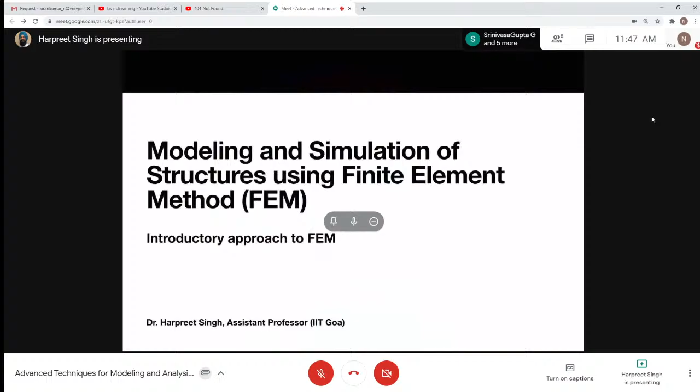Okay, so the topic of my talk is modeling and simulation of structures using finite element methods. Today I'm going to give you an introductory session for the FEM approach, meaning the finite element method approach. Let us start with this.

So first of all, what is FEM? I think you guys have heard many definitions of FEM, and I've mentioned a few in this presentation. The most prominent definition is that it is a numerical method for finding out the solution of a boundary value problem, which is formulated in the form of partial differential equations.

Professor Mahajan already mentioned in his talk that every physical phenomenon, whether mechanical, thermal, fluid, chemical, or any other, can be formulated in the form of partial differential equations. Along with partial differential equations, if we have some boundary conditions, then collectively we name this partial differential equation problem plus boundary condition as a boundary value problem.

So finite element method is one of several techniques available, and it is the most popular method for finding the approximate solution of these boundary value problems. This is not an exact technique for finding the solution of boundary value problems — it is a numerical method, and also an approximate method, meaning it doesn't give you the full 100% exact solution of the partial differential equation. There will always be an error in the system, and we always try to minimize that error. There are various techniques to minimize it.

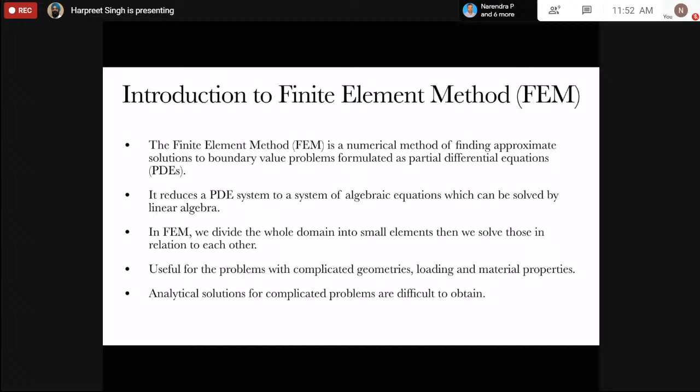So let us see the history of FEM. The history of FEM goes very far back. In early 1943, R. Courant gave the technique of solving structural problems using the principle of minimization of energy. This is also called the Ritz method nowadays. He used that technique for solving complex structural problems, and he succeeded, and it became the basis for FEM.

From 1950, the Boeing team started working on complex geometries. They divided the complex surfaces into triangular subdomains and started using algebraic methods for getting the behavior of those small triangular subdomains, then assembling those into the large system. From 1950 to 1960, the Boeing team worked extensively on this technique, and after that they started publishing in that area.

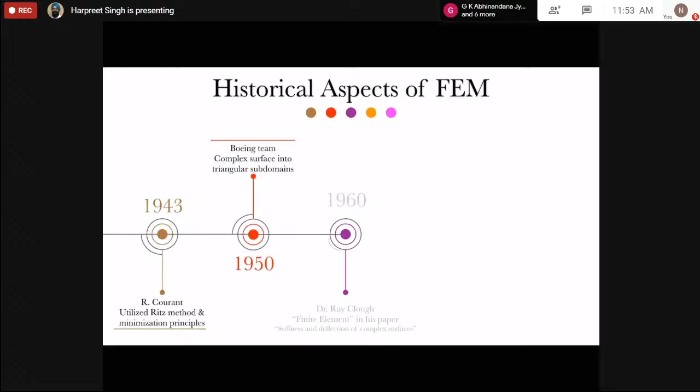In 1960, a research paper was written by Dr. Clough, and in that paper, for the first time, they used the name 'finite element' for those subdomains. The name of the paper was 'Stiffness and Deflection of Complex Surfaces.'

After that, from 1960 to 1970, this decade, I would say, is the era of FEM. In that decade various techniques related to FEM were formed, and a company called MacNeal-Schwendler Corporation, MSC, developed an FEM code for about 68K nodes, written in collaboration with NASA, and they named this code MSC Nastran. That became very popular during that era.

From the 1980s to 1990s, various agencies and research organizations started working on FEA, and they also combined various CAD techniques available with FEA. In that period, they merged FEA and CAD into one platform and used it for solving various structural problems. Nowadays it is very common; easily available packages can be found in the market which we can use for solving complicated structural problems.

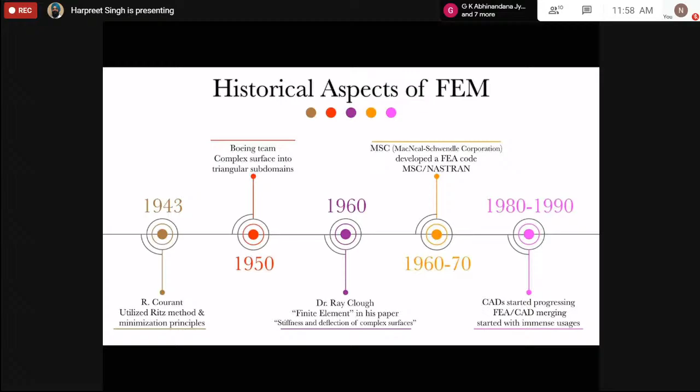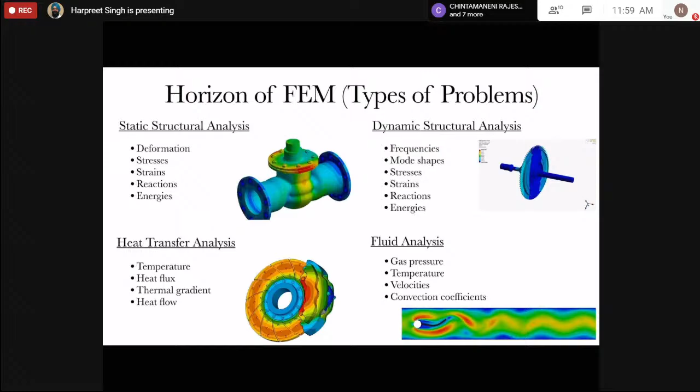So let us focus on solid mechanics or structural problems. On the basis of loading, I want to mention the spectrum of different kinds of problems we can solve using FEM, especially in case of solid mechanics. Solid mechanics problems, based on the loading type, we can divide into two categories: one is static problems, other one is dynamic problems. This shows the static side and this shows the dynamic side.

This is based on the type of loading. If the loading is a function of time, then the problems are lying in the area of dynamic side. And if loading is constant with respect to time, then it is called static problems.

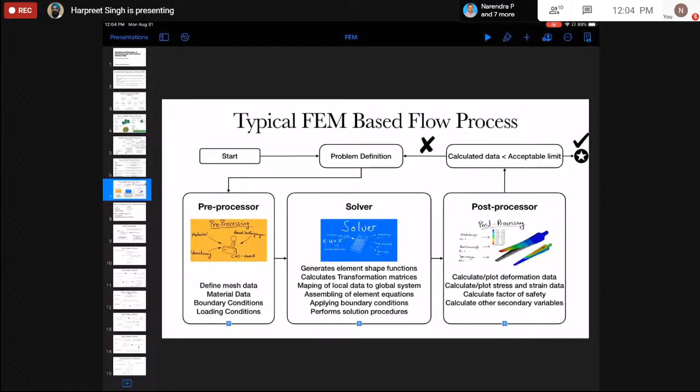So what are the typical steps we follow in case of FEM? There are 6 steps which we follow in FEM analysis. First of all, we discretize a domain into subdomains. This first step is named discretization. The subdomains are especially called elements here, and the whole process of discretization is called meshing.

We have various tools available apart from FEM solvers which are used for this purpose. Have you heard of Hypermesh or Gmsh? These softwares we can use for discretization of the bigger domain into subdomains, and these subdomains are called elements.

So the second step is named developing the elemental equations or elemental governing equations. In that step, on the basis of the shape and order of those subdomains, we develop or write the elemental level governing equation for each element.

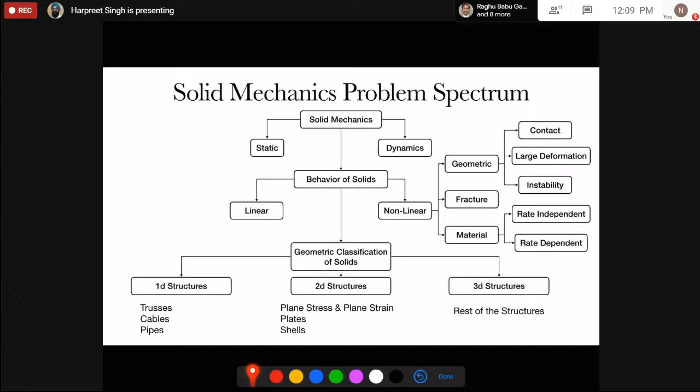Now let us talk about the FEM based flow process, meaning the design flow process. If you want to design a system, what are the steps you will follow where you can use the FEM technique? First, we define the problem statement, which will be in the form of domain size as well as other parameters, for example boundary conditions, material properties, or time dependent material properties. These will be part of the problem definition.

After getting all the information regarding the problem, what we do is supply that information to the preprocessor.

The preprocessor means the information passed to the preprocessor that will be used for further processing, meaning the material data. For example, in case of structures, we give elastic modulus, Poisson's ratio, density of the material, or if we want to analyze plastic material, then we give the yield strength or the hardening modulus or other things. This material data is supplied in the pre-processing stage of the FEM.

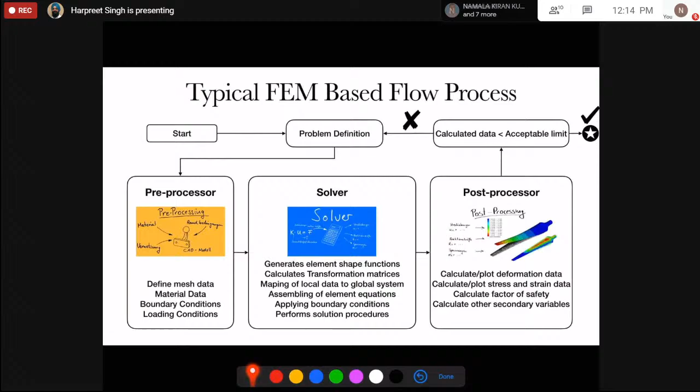Next we will talk about the basic terminologies used in structural analysis. We have already seen that we generally write the partial differential equation for a structural domain, and in that equation we generally see these variables: forces, tractions, and point loads. The first is forces or body loads or volume loads, the second is tractions, which are surface loads, and the third is point loads.

All these are used for formation of the partial differential equation of the system, which we call the equation of equilibrium. In case of structures, this takes the form: sigma ij comma j plus fi equal to zero. That is the equilibrium equation for structural problems.

Sometimes we also see boundary conditions in the form of displacement being zero in some portions, or displacement at some boundaries or subdomains being constant. This is especially the displacement boundary condition. But we can also mention that sometimes forces are specified on the boundaries, either in the form of point loads, traction loads, or body loads.

Okay, so these are the terminologies which are used for the structural problems. Apart from that, how we can process this one, we have various methods.

The methods which are very famous are Galerkin's method and the Rayleigh-Ritz method. Rayleigh-Ritz method is another form of the principle of virtual work for structural mechanics problems. These two are approximate methods for finding out the solution of the partial differential equations. Either of these two could be used for finding out the solution of the partial differential system, and these are the fundamental framework for the finite element method.

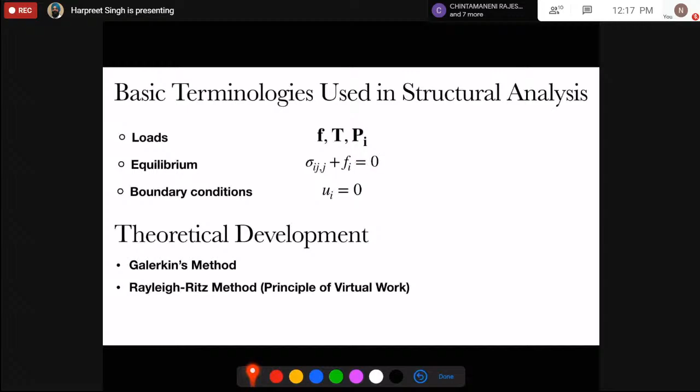I think I talked about finite elements, nodes. So what are these? Nodes are nothing but specific points related to the particular element where we want to see the values, meaning we want to calculate the values of the primary variable as well as the secondary variable. These, I would say, are the points of interest.

Apart from that, we will also hear about shape functions. So what are these shape functions? These are the interpolation functions. As I told you, FEM is an approximate technique. We are using some kind of interpolation functions or approximate functions for finding out the values of primary variables. So these shape functions are related to those.

I have given an example here also, that suppose we want to find out the value of phi, which depends upon x and y coordinates. This we can write in the form of shape functions N1, N2, N3. These are the three shape functions, and phi1, phi2, phi3 are the values at some specific points, meaning those points are called nodes. I will also explain more about shape functions in the next slide.

Apart from that, you will also hear about degree of freedom. What are the degrees of freedom? These are the independent variables associated with each node, or sometimes we also associate them with the element. The number of variables which define the state of the system per node is called degrees of freedom. Sometimes we also combine all the nodes of an element and take the sum of all the degrees of freedom, and say that is the degrees of freedom of that element, but this is not the right approach. Degrees of freedom are more related to the nodes.

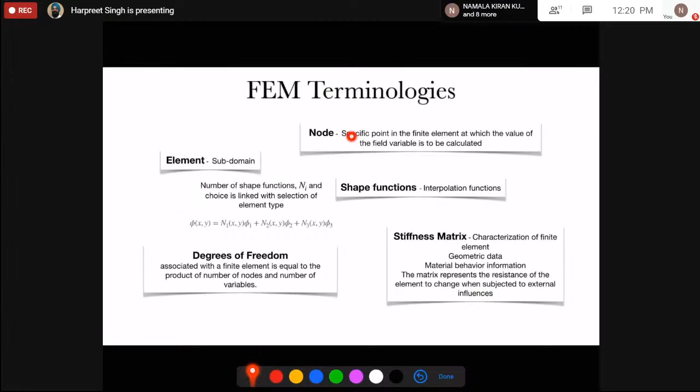Let us use a simplified approach called the direct stiffness method for understanding FEM. This whole method we can relate with FEM, and we can say this is the method which is being followed behind the FEM technique or FEM software. So first of all, what is happening in case of direct stiffness method? We can start the understanding of direct stiffness method by taking a simplified spring element.

This is a spring which is shown here, having stiffness K, and the length of the spring is L. On one side, I have named this end as 1, and the other end is named as 2. At 1, I can now assign the degrees of freedom. Suppose this is only a 1D system, it can move only in one direction, so it will have only 1 degree of freedom per node. These 1 and 2, we can say, are the two nodes of the system.

U2 is the degree of freedom at node number 2, and U1 is the degree of freedom at node number 1. U1 and U2 are both the primary variables of the system. Apart from that, there are forces at these two nodes: F1x is the force applied at node number 1, and F2x is the force applied at node number 2.

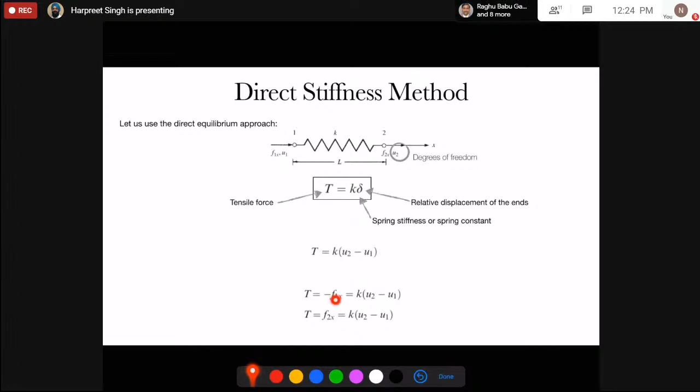If I use these two equations further, which are written here, and change these two coupled equations into a matrix equation, I will get this system of matrices. The first one is the force matrix, which is a column matrix, the other one is the stiffness matrix, where all the stiffness values or spring constants are written, and the third one is the degree of freedom matrix, which is also a column matrix. This system of equations gives us the behavior of the system.

So how does this spring system react after applying the forces? We can apply forces as F1x and F2x, and ultimately, by applying these forces, we will get the response of the system as U1 and U2.

Further, we will assume this system is a linear system. K is constant, and the forces and displacements are related with each other in a linear fashion. If I use that assumption, then I will see that my displacement from U1 to U2 varies linearly. After applying this linear variation assumption, if I use the boundary conditions, suppose on one end I name this as 0 and on the other end the value of x is L, then using these two boundary conditions, I will get U1 as A1, and A2 as U2 minus U1 divided by L.

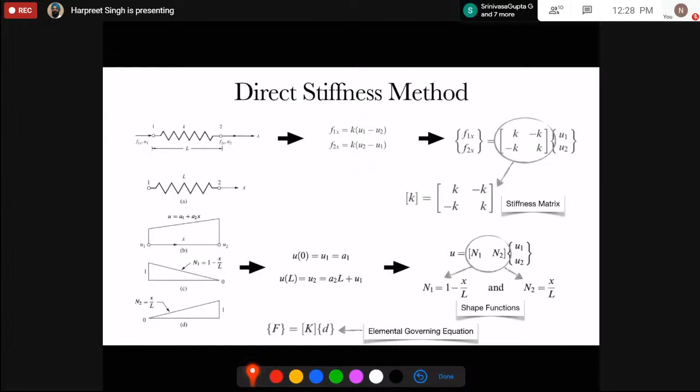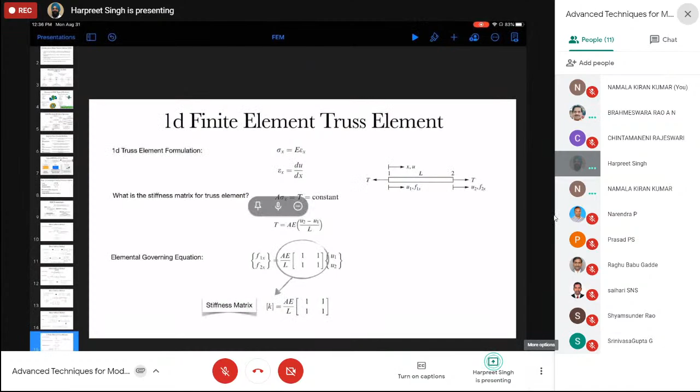Okay sir, sorry about the presentation. Yes, it's fine, not more. Okay, fine. Yeah, it's coming now. Can you see you now? Thank you sir. Done, we are seeing your screen.

Okay, 1D finite element. So earlier we talked about the direct stiffness method, which was used earlier, in the 1950s or 1960s, for the analysis of structures.

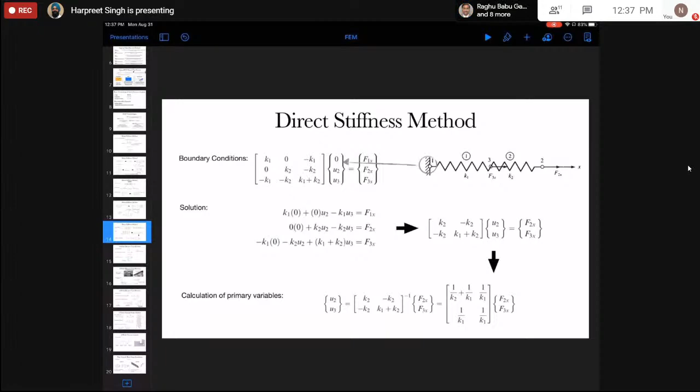Sorry. Have you... I think I talked about this one, but I was not sure whether you had listened about this one or not. But now I'm talking about this. I was not aware when my connection was disconnected.

Anyway, okay, so now we'll talk about the 1D finite element truss element. Now we can relate our direct stiffness method with the finite element method. Earlier we have seen we have the F matrix, we have the stiffness matrix, we have the degrees of freedom matrix. So how can we get the stiffness matrix in case of a truss or a bar? How can I get the value of stiffness for the bar?

So for the bar, we have this constitutive relation sigma x equal to E epsilon x. This sigma x I can replace as force equal to area into sigma x, so I can replace my T as area into sigma.

This can be replaced, and further if I use this relation, if I replace sigma x with E epsilon x and I replace epsilon with U2 minus U1 divided by L, I will get ultimately this form of equation. What I'm doing is replacing sigma in this equation with E into epsilon x, and epsilon x I am saying is U2 minus U1 divided by L, the change in length divided by L. So ultimately I will have this system of equations.

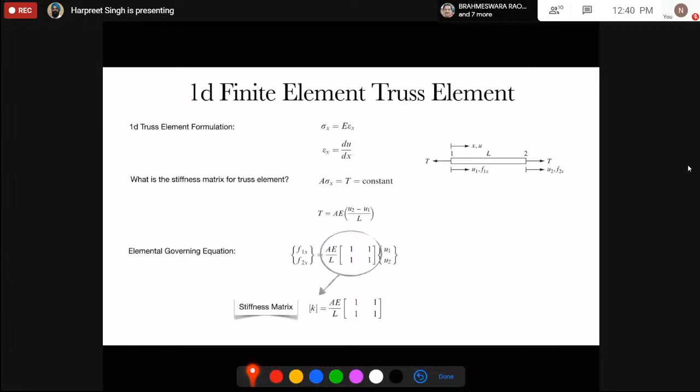Okay, so this is about the truss element, which is aligned with x-axis. But if I want to use this truss element for analyzing a problem, for example analyzing this structure, large bridge, or other one.

But here I can see all the elements which are there are not lying along the x-axis. So these are inclined with the x-axis. So how can I use my truss element, which I have only formulated for the x direction displacements?

So here I will use the transformation matrices, the transformation of coordinates. I think you might have heard about this in your mathematical courses, how we can transform the variables from one coordinate system to another coordinate system. What we will have is the transformation matrix.

That transformation matrix will be in the form of cosine theta, sine theta, and cosine theta. This will be the transformation matrix, and by multiplying the system of primary variables in one coordinate system with that transformation matrix, I will get the new primary variables in the other coordinate system.

So now I can replace my capital D, or degrees of freedom matrix, with T inverse or T inverse D dash.

Okay, or I can use my same truss element along with the transformation matrix for any orientation of the 1D structure.

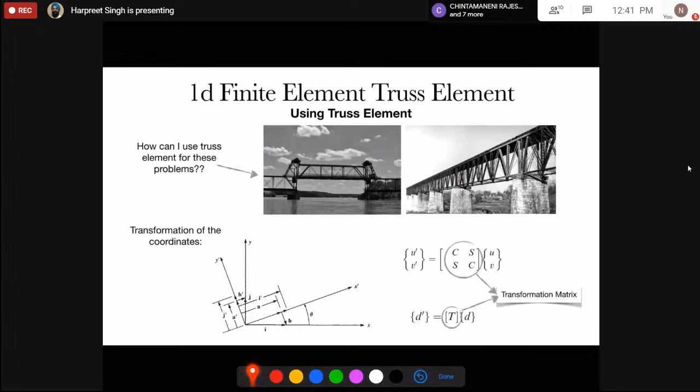So the transformation matrix we have seen in case of simple two-dimensional problems is coming as C S S C. But for generalized truss element, means for three-dimensional problems or for other problems, this will come as C S 0 0 0 0 C S.

Because in each node we will have, for two-dimensional problems or for inclined truss problems, 2 degrees of freedom, means U1, V1, U2, V2.

Okay, so this we can use along with my degrees of freedom matrix for the calculation of new degrees of freedom in the new coordinate system.

So the same thing I can use in case of forces also, where I have the force matrix transformations, and then I can use the same technique for transforming my stiffness matrix.

Means here I will multiply by T transpose K dash T. So in this case also I will transform the stiffness matrix, which is aligned in the x-axis, to any generalized inclination of the coordinate system.

Okay, so ultimately I will have the K matrix, or stiffness matrix, in this form.

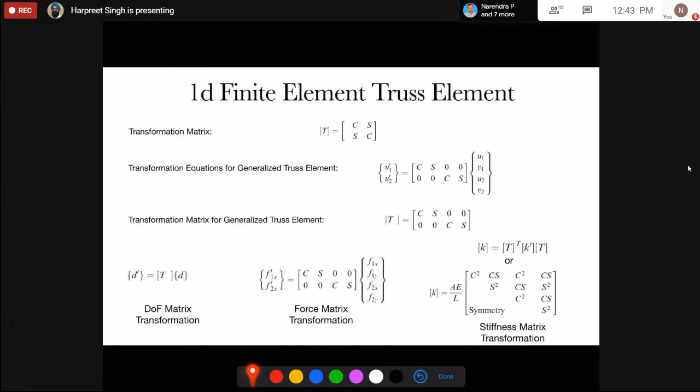This is about the truss elements, where the stiffness is only the direct stiffness. But we have structures like this one.

I think electric poles you might have seen, or maybe buildings where the skeleton of the building, we can analyze using this one-dimensional FEM approach.

Okay, so here we will have degrees of freedom per node. So apart from the displacement, we will have the slopes also.

These two rounded arrows are showing the slopes at each node. Okay, so these additional degrees of freedom will change the truss element formulation.

Means we have to introduce more degrees of freedom in the system, as well as more material data and more geometric data into the system.

So in that case, we will name our new element as the frame element. Okay, in this case, our stiffness matrix will be in this form.

Means okay, here EI upon L cube is the bending modulus, means the bending properties, those will come into the picture.

I think you have also seen this kind of system while analyzing the beam problem. Okay, so further, sometimes our two nodes will not be sufficient, so we can introduce more complexity in the form of increasing the order of the system.

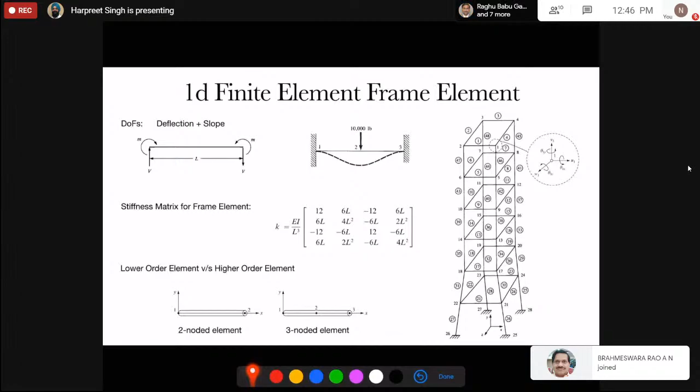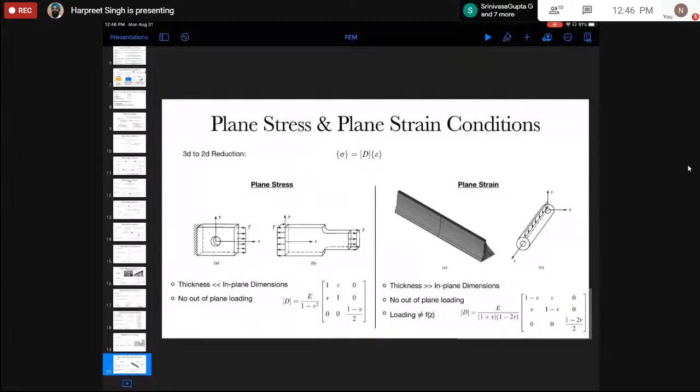Am I audible? Hello. Yes, sir, yes, sir. Okay, yes sir. Sometimes I listen to the sound, just like I got disconnected. Anyway, so...

Next, we can discuss how we can name problems as 2D structural problems. Apart from plates and shells, which visually we can see are 2D structures, we have other approaches for defining the 2D approach: the plane stress approach and the plane strain approach. These are the two conditions on the basis of which we can analyze a generalized 3D problem using the 2D approach.

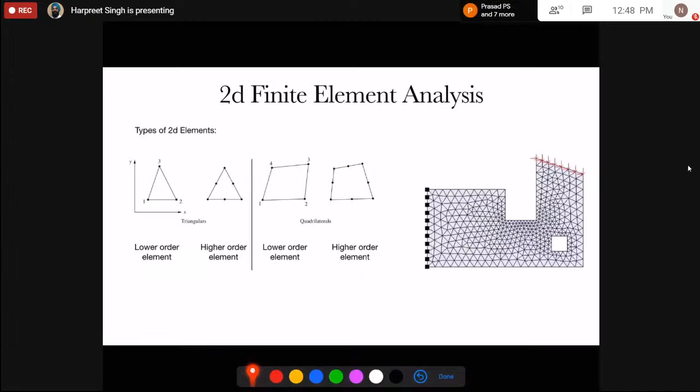In case of the plane stress approach, how can we apply it for the reduction of a 3D problem to a 2D problem? If we have a domain whose out-of-plane thickness or out-of-plane dimension is very less as compared to the in-plane dimensions, then we can say that condition for assuming plane stress is fulfilled. The second condition is there should not be any out-of-plane loading, and the loading should only be a function of x and y. If these two conditions are fulfilled, then we can say this is a plane stress problem.

Here, what will happen? We have the relation between sigma and epsilon, and sigma and epsilon are related with each other through this constitutive matrix. For the plane stress approach, we have this kind of constitutive matrix which can be used, and this 3D structure we can analyze using the two-dimensional approach. We only model the cross section, apply the loads, and then we get the deformation or stresses.

The other category is plane strain problems. What happens in case of plane strain problems? We will have one dimension, the out-of-plane dimension, that is very large as compared to the in-plane dimension. The classical example in this category is the dam problem, where the cross section, the third dimension, is very small, or rather the out-of-plane dimension is very large as compared to the in-plane dimensions. In this case also, apart from the geometrical condition, we have loading conditions for the assumption of plane strain. First, out-of-plane loading should not be there, meaning we should not have loading in the direction of the large dimension. And the loading should not be a function of z, the direction of the larger dimension.

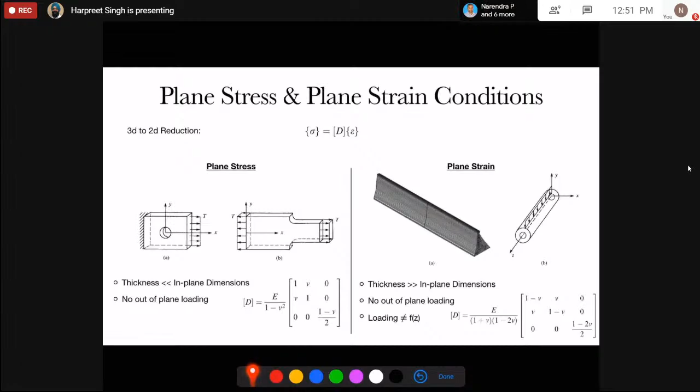Okay, so I will briefly talk about the triangular element formulation here. The triangular element which I have shown earlier can be used for 2D FEM. Here each node will have 2 degrees of freedom, U and V.

We will separately assume an approximate function for U and this form of approximate function for V. In this approximate function for U, we will have these three shape functions, and apart from that we will have U1, U2, U3, or Ui, Uj, Um values of unknown variables at these nodes. We can see that the shape functions are also being used for the formulation of the two-dimensional triangular element.

I can use this form in matrices so that I can apply linear algebra techniques. If I simplify these matrix equations, D is the degrees of freedom matrix, and psi is the approximate function matrix. We can write psi as equal to the shape function into the degrees of freedom matrix.

So apart from that, in case of the two-dimensional triangular element, we will have the shape function and the strain displacement relationship, where the B matrix is called the strain displacement matrix. These two, psi functions as well as epsilon equal to BD, collectively we can use for the formulation of our stiffness matrix, force matrix, and degrees of freedom matrix. These along with that we can use for the final formulation of the triangular element.

I cannot talk about all the details here. Anyway, after getting the values of the degrees of freedom matrix, or solving the primary variables using FEM, this is how we can calculate the secondary variables, meaning stresses or strains. The strain will be B into D. This is strain, and if I multiply the strain matrix with D, I will get the stresses for each element or at each node also.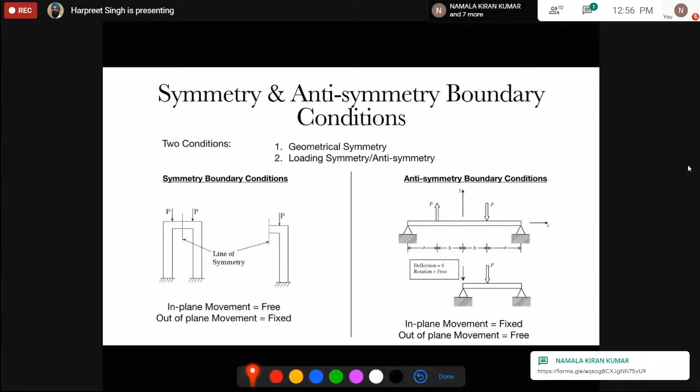So why do I want to reduce the size of the problem? Because the simulation cost is directly linked with the computational time and the cost of the computational hardware we are using. I want to save computational time as well as use cheaper computational hardware for solving these problems. The simulation cost is directly linked with the number of nodes in the system as well as the degrees of freedom per node. So if I reduce the number of nodes, I'm directly saving the cost.

Then I can say there is a geometrical plane about which the structure is symmetrical, and the loading is such that the symmetry condition is maintained, as well as the boundary condition. So instead of modeling this whole domain, I can model only half of the domain, and on the cut plane passing through the center line, I apply out of plane constraints equal to 0 and in plane movement equal to free conditions. So this is how we can reduce the size of the problem.

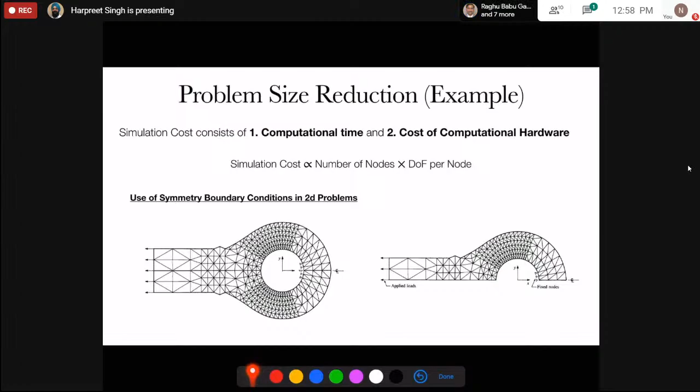Apart from that, we have to take care of some important parameters while meshing the system, because those are directly linked with the accuracy of the system. So how can we improve the accuracy of the system? We have some practical considerations already. First is the refinement of the mesh.

If I have the system and I refine the mesh, I can reduce the error. I already mentioned that FEM is an approximate technique. We will always have some kind of error in the system, that will not be the exact system. So how can I minimize that error? The first approach is I can refine the mesh.

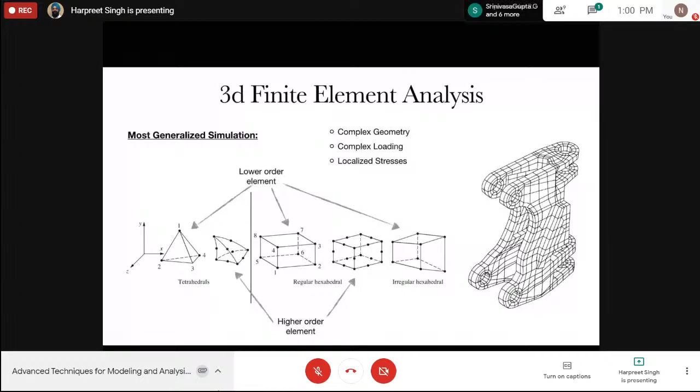So that is up to us, how much error is acceptable for us. The other consideration is mesh quality. We have defined some parameters regarding mesh quality, just like aspect ratio, the largest angle, and the warping ratio. These are the parameters which define the quality of the mesh.

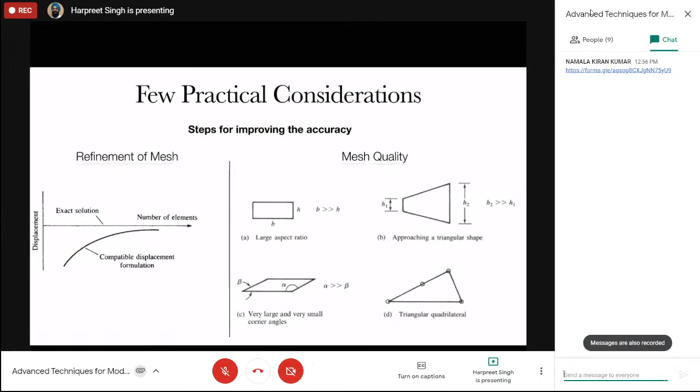Apart from that, we have a few commercial FE tools which are being used by industry people - ANSYS and Abaqus. These are two of the most famous ones widely used among industry people. And apart from that, we have MSC Nastran, COMSOL, LS-DYNA which is basically for explicit problems, and ADINA also. These are the tools which are there in the market, or on the website also.

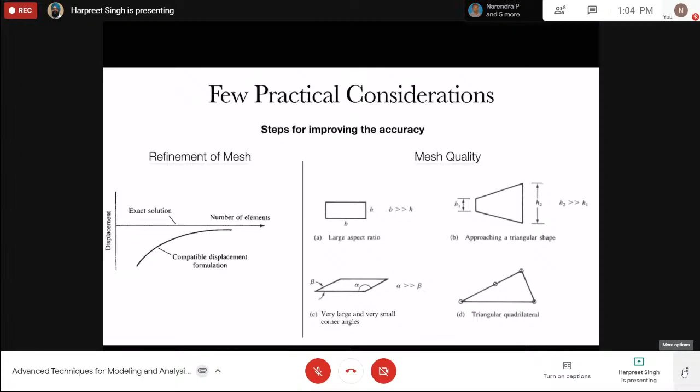So I think here I want to conclude my talk. I think I took 5 minutes more than the assigned one.

Sir, thank you for your valuable time. We'll meet at 2 o'clock, sir. Is it okay, sir? Yeah, for me that is fine. In the next section I will demonstrate a problem, how we can solve it using an FEM package. Yeah, that's great. For the participants, any question?

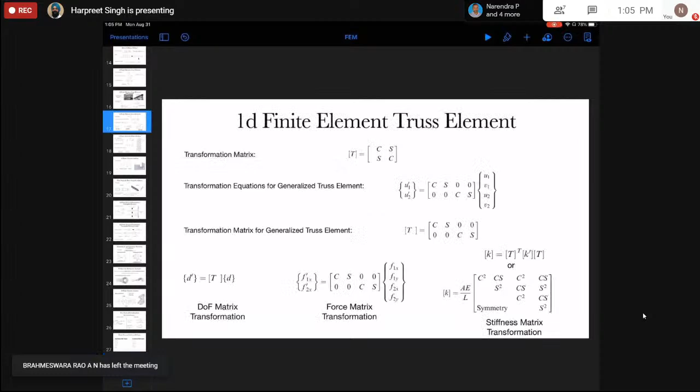Sir, actually in one of your slides, there will be the stiffness matrix for the bar. Yes, sir. That should be minus, minus. Yeah, that is wrong. So that's all, sir, I think I missed. Thanks for the correction.

But they were posted in the chat box. How can I select the element - that should be the question, because nodes are linked with the elements.

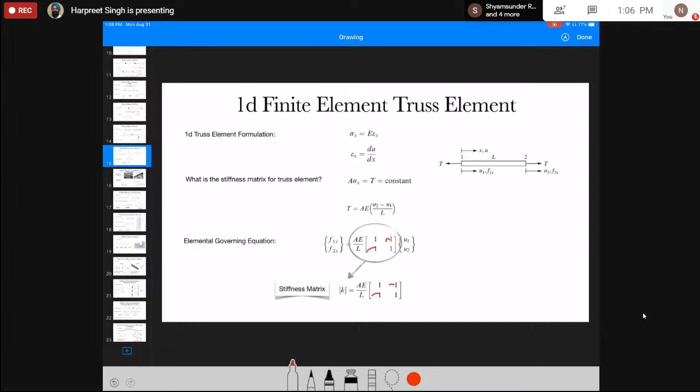Suppose I want to select the type of element for two-dimensional problems. So we have two kinds of elements - one is the triangular one, and the other is the quadrilateral one. For the triangular one, the assumption is that it is a constant strain triangle - the strain is constant in this case, but with the quadrilateral we can get variable strain.

While selecting the type of element, we have to think about whether we want the exact value or how much accuracy we want in terms of strains. If we want more accurate strain, we have to go with the quadrilateral element, and if we can compromise on accuracy in terms of strains, we can go with the triangular element. But certainly, the more nodes we have, the higher the cost of simulation. So we have to think about how much accuracy and how much cost we want to spend.

Yes, answered. So if there are no more questions, we'll wind up this session and meet at 2 for the hands-on session. Some practical scope of modeling and analysis will be discussed in the afternoon session. Would start at 2. Sir, thank you very much for listening to me.